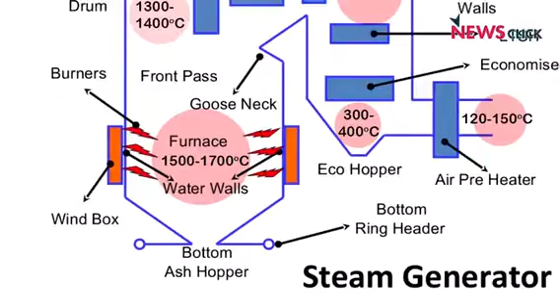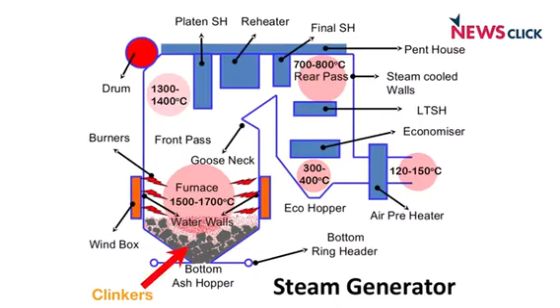This is a boiler, and this is the bottom ash handling system, from where the non-combustible residue is released as hot ash. According to sources, there was a problem of clinkering taking place in the boiler. Clinkering is when the ash becomes solidified, almost like blocks of cement.

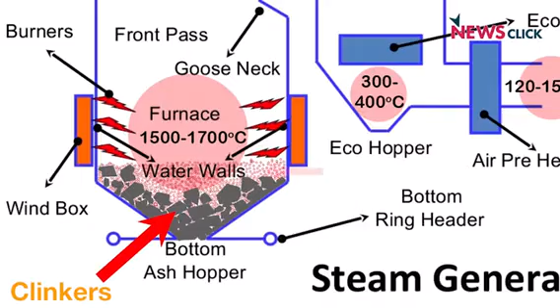The clinkers choked the bottom ash hopper, leading to a huge buildup of ash inside the boiler. As a result, the pressure inside the furnace started increasing. So, the NTPC officials tried to bring down the load.

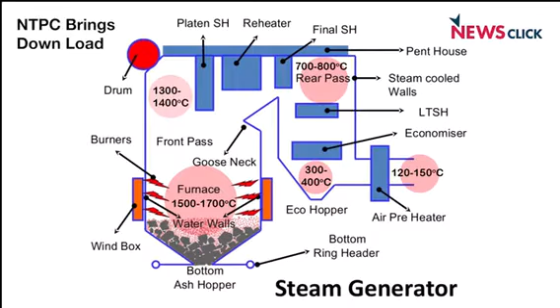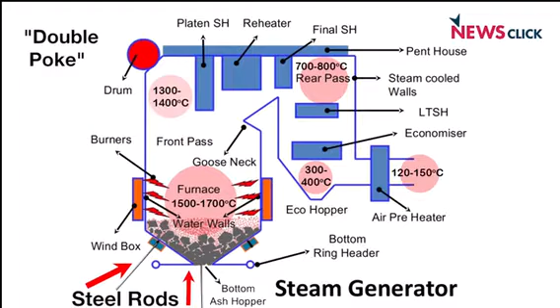At the same time, they attempted to remove the clinkers manually by inserting steel rods through the manhole doors and the bottom ash hopper, a process known as double poke. It is crucial to note here that, at this point, it appears the NTPC officials bypassed the boiler protection by disabling the master fuel relay trip, which cuts off fuel supply when the pressure gets very high, because they wanted the boiler to keep running.

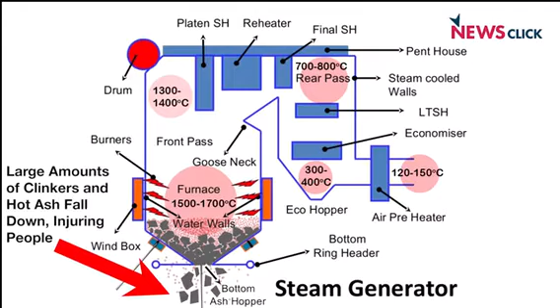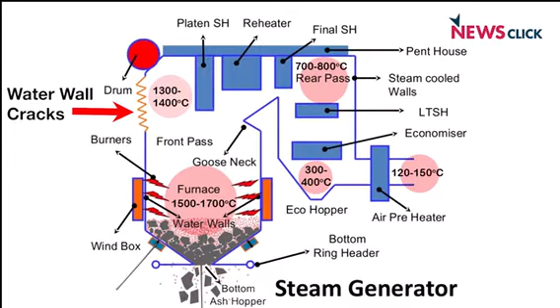As a result of the double poke, a huge mass of clinkers fell down, creating unstable conditions inside the boiler because of large pressure fluctuations. This led to the water walls being cracked, and unburnt coal particles got carried over to the rear pass of the furnace.

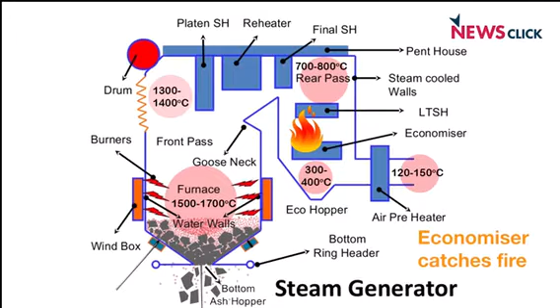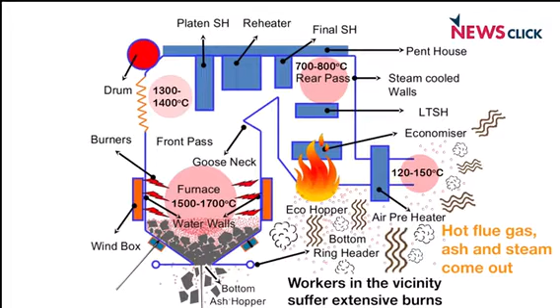In the rear pass, the unburnt coal particles caught fire, leading to an explosion in the economizer. Hot flue gas, ash, and steam came out of the economizer area, causing extensive burns to the 300-odd people who were working in the vicinity of the boiler.

Why was the boiler protection bypassed? Why were there so many workers around the furnace? Is it because work on the unit was still pending, as sources say? Why was the unit put under commercial operations when it was not yet ready? Only the NTPC has the answers.